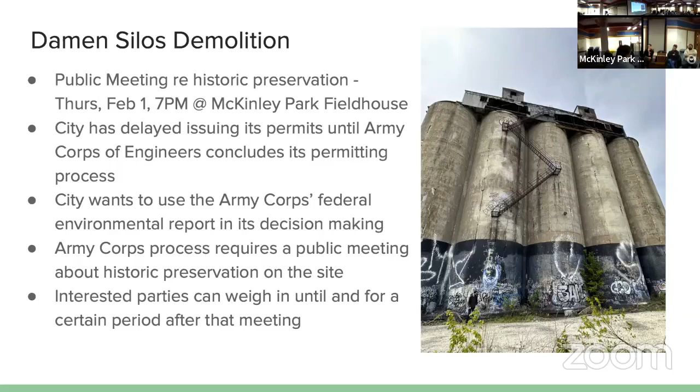We are running two classes with UIC. We had a site walk as the temperature dropped below zero on Saturday, so I really want to thank our graduate students, several of whom are online with us right now, for braving the weather and coming out.

Also, one of the fun things I learned today—did you know that you can buy a CTA sign from CTA? I pulled these up on their website, and I thought, when we grow up and have office space, I really want one.

Anyway, we're going to be looking at two projects in the neighborhood. There's an undergraduate seminar working on some basic design and community engagement work, and they are going to be looking at the alley between 35th and Archer, near the Family Dollar—the alley that goes right to your office at Briza—and how to make that more welcoming, with the idea that we'd encourage people to use it as a pedestrian path instead of walking on Archer. So we'll be looking at things like cleanup, greenery, maybe moving some dumpsters, public art, better lighting, and some basic retail stuff.

Part of the hope is that if we can do that much, we might eventually get CTA to turn over the parking lot right next to it, which is one of two parking lots serving that L station, with the idea that it could become a linear park.

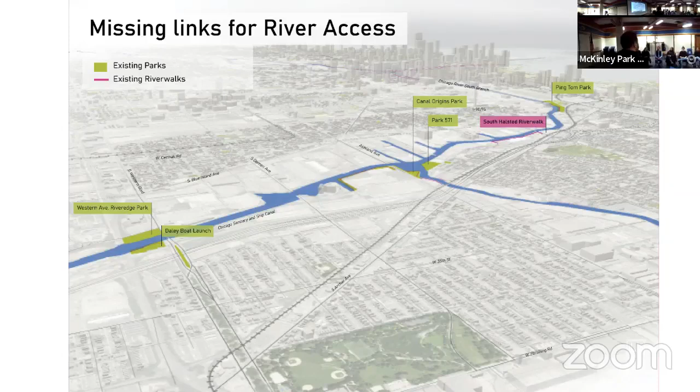We're in talks with different railroads, different property owners, to see what we can do to extend the paths. As Kate said, there are riverfront guidelines, so whenever anyone sells property, they have to build a path.

But at the end of the project, in the future, ideally someone will be able to get from Western all the way to Ping Tom Park, and then someday all the way to downtown, without having to get on any of the major streets like Archer, which is not so pedestrian friendly.

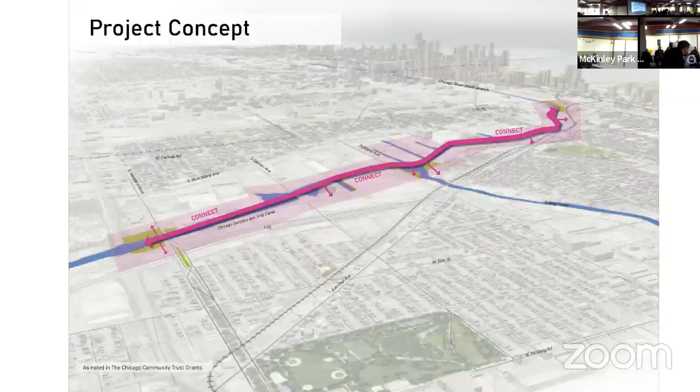So like we said, there are currently riverfront guidelines. So if the silos get torn down and they build something, they'll have to build a path to the specificity of a template path, gravel, specific trees, and whatnot. Existing property owners don't have to follow these rules.

But as we talk to them and we can get them to build paths, we'll try to build something that mirrors the guidelines as closely as possible, so it feels like one continuous, similar path. I'll turn it over to our guests, unless anybody has questions about what we've done so far.

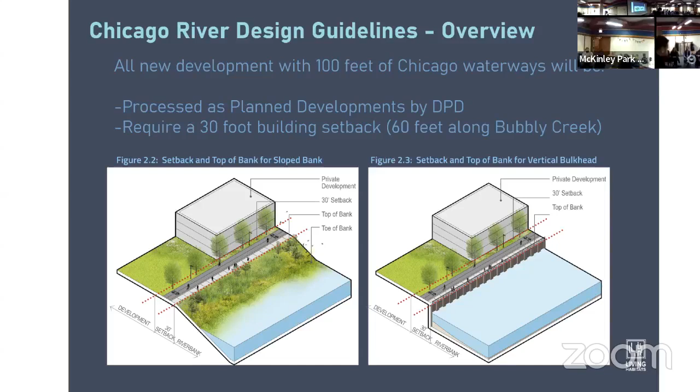Slides while you take questions. How's it going? It's going well.

So we've done our initial assessment of keeping track of everyone who owns property along the riverfront. We know everyone who owns something on there. We've had two community feedback events, one at the Riverfront Trail on Halsted, right behind, and then one at the holiday market that we hosted.

And those have gone well. We're going to have additional ones. We're in talks with the BNSF, Canadian National, ComEd, to try and figure out what we can do to get them to let us run a path through their property.

There's a few railroads, there's a railroad that runs between Damen and Western that doesn't get used, and it's a long strip of land that would connect that. It's owned by the BNSF, so we're talking with them. Same thing with Canadian National, trying to figure out how to get people across Halsted. ComEd has a substation right next to the current path. So we're talking with everyone to see what they'll agree to do, and then figuring out who's currently selling or planning to sell property.

Because if it sells and they develop it, then we'll have to get another path, so we need to make an inventory of everything. But it's going on, people are talking.

If you need any assistance with any of the folks connected to the railroad companies, I can help, and with IDOT too. There's a little piece that belongs to IDOT.

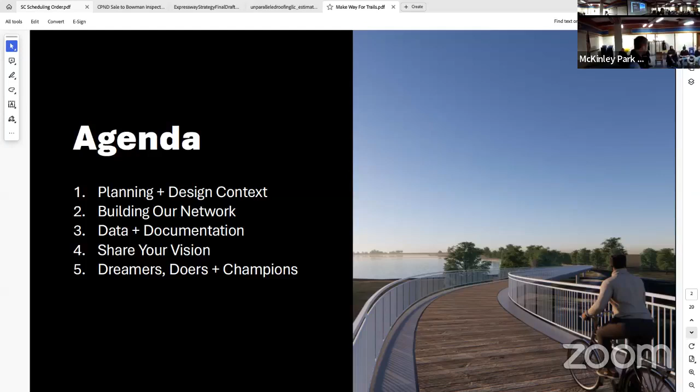They also can operate in a cross-jurisdictional manner, which is very hard for the Chicago Department of Transportation or IDOT to do, because they're really only allowed to do things that they own.

Cook County spreads a little bit thinner and can do a lot more interesting things. The work I currently do in an on-call capacity with Cook County is stitching together some of the sticky gaps in your trail network that are part IDOT, part railroad, part park district. Sometimes closing those gaps can be the most impactful.

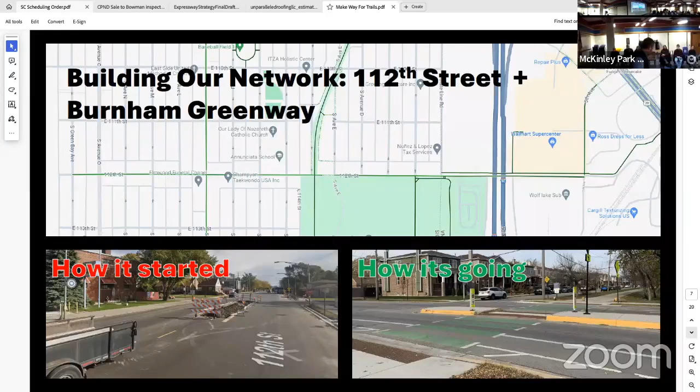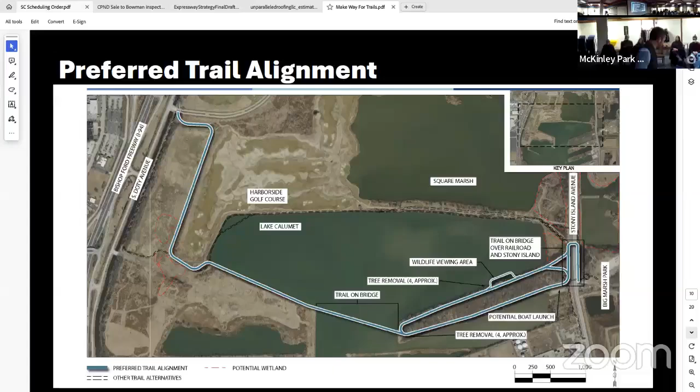The exciting thing about working on studies like this is you also have access to a team of people who can render and say, well, what would it look like when we build it? That is a huge win, and I think it's really important.

This shows what the trail would do as it crosses Stony Island Avenue. Sometimes the best way to deal with the railroad is to say, we're just gonna go over. It's much easier to get an overpass than an at-grade crossing or an underpass. You don't have to deal with drainage, security, lighting, all of those things, but you need to go pretty high up in the air. So this trail begins to rise from pretty far back to meet the clearance to get over Stony Island. And the good news is it would land right in Big Marsh Park, so you're not having to then navigate another intersection.

The Park District and Big Marsh were supporters of this and members of the steering committee. So when you're thinking about who might be involved, start thinking about who owns the property that you want to have access to. Do they benefit in some way, or can you structure this so that it's a mutually beneficial or community goodwill building effort?

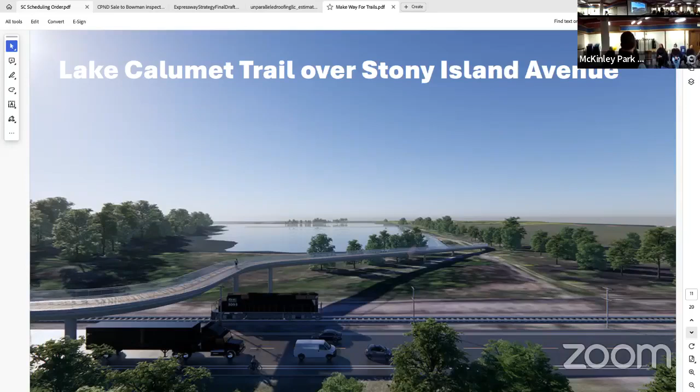But once you also start sharing the vision, people start asking, how much is this going to cost? I think it's always important to think of these items I was alluding to. Who owns the land? Who's in the business of actually owning a trail? Sometimes you're asking someone to be the owner of a trail and they've never done so. They have no concept of what kind of immunity or liability insurance they would need for someone that has a slip and fall or gets injured on the trail. So finding entities that are familiar with that is also a component of getting buy-in on a trail network.

You also want to know who maintains them. A good anecdote we learned in this process is the Chicago Park District, a big supporter of trails, does not have structural engineers to investigate, inspect, and maintain bridges. They would rather the city of Chicago take that on. So if you have a structure, the Park District may not be the best one to take that on. This requires a lot of formalized coordination so that the people who have the expertise, the funding, and the jurisdiction to do the thing you want are right in the room.

There's going to be a lot more investigation that goes into making this trail a reality. So the study outlines the kinds of investigations you'll need to take on. Kate alluded to historic and environmental concerns. There's also groundwater, contaminated soil, special waste, soil structure. A lot of those things come into play later on, but this helps set the stage so that the city, the Park District, and any stakeholder or consultant knows what they're getting themselves into.

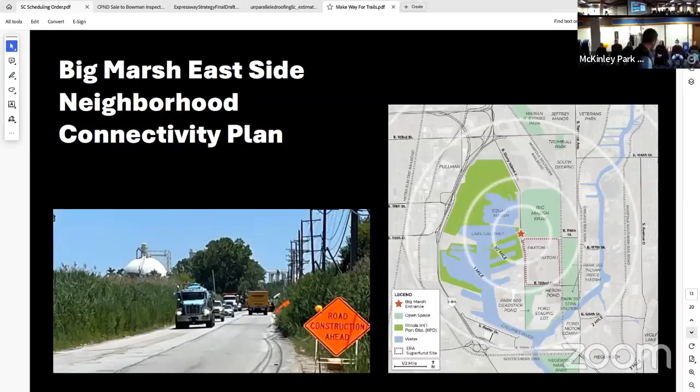Because you've got truck traffic in both directions and wetlands on both sides, it's not your best candidate, but 116th Street is probably better suited.

The follow-on from Lake Cal into this study was to make sure we're being consistent between plans and not creating a contradiction or conflict. The goals of this project were to connect these facilities to each other and confirm who has jurisdiction. Sometimes the state has jurisdiction of the roadway, sometimes the city does. Interestingly, 116th Street is not actually a street anymore - it's an almost vacated right-of-way fully owned by the Chicago Park District that intersects with Torrance Avenue, which is under state of Illinois jurisdiction. The 3 houses at that intersection are still on septic tanks, giving you an idea of how old this area is in terms of development.

The other thing we look at is once we say it'd be great if we had something on Torrance, we need to make sure that recommendation is feasible. Otherwise the state of Illinois would say we can't make that work, we need all of this space for the traffic that's currently there, we don't have access to additional right-of-way. And as I mentioned before, almost everything down here is either a Superfund contaminated site or a wetland, almost no in between. We also always need to figure out what is the cost to build it, and what is the cost to maintain it.

A good case in point is if you've ever biked on Stony Island, there are bike lanes out there, but it's not in the street sweeping program on a regular basis. So even though you can get there, there's glass and debris on the bike lane. Their recommendation is if and when you upgrade it, please start sweeping it - some things as simple as that.

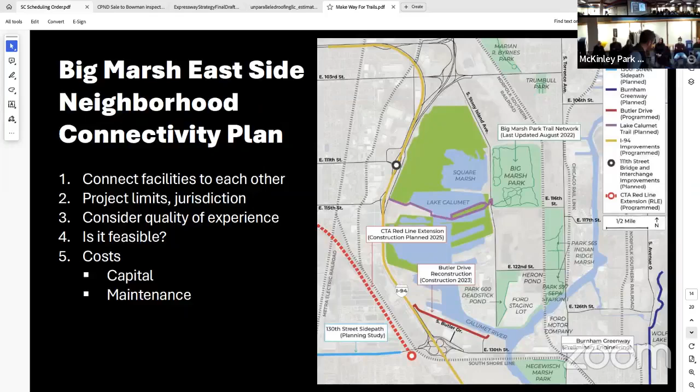The 116th Street vision is pretty straightforward. It's not going to be a very busy or trafficked street. One preliminary idea was to just make a shared street out of it - very low speed, very low volume, pretty low stress. So maybe we can just do a shoulder and some shared travel lanes. It's going to behave more like a park entrance drive than a street, since it terminates just a few hundred feet to the west where the bridge over the railroad tracks would begin to get into the big park.

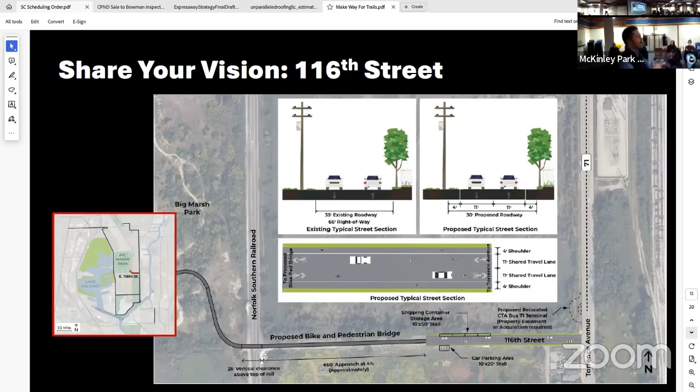When we talked with Cook County and the park district, they said if this starts to come together, maybe we start to use this as our main entrance to Indian Ridge Marsh, which is the other major land holding out that way. So they started building their own case, saying they wouldn't invest in paving a street that just leads to somebody else's park. But if we make this part of a larger system, then we can make a stronger case.

Getting people from farther away - if you're familiar with 103rd Street, this is an intersection where 103rd Street, Doty, and Stony all become part of this big spaghetti bowl of interchange nonsense. We said that's not low stress either. So how do we get people from the CTA 103rd Street terminal across 103rd Street onto Doty Avenue, which is heavily trafficked with trucks, and give them their own space?

And those bike lanes on Stony, rather than one buffered lane in each direction, let's put both of the bike lanes on one side, add some protection, and finally create a facility that you would feel comfortable biking to Big Marsh Park with your family.

Can you take a second with these to explain right of way? Sure - because for some of our neighbors, these are going to be some new terms.

So what you see in these images is how wide the road is from edge of pavement to edge of pavement. That's the available width that we know the road is today.

It's also important to know how much property the city or state has beyond the roadway—that's referred to as the right of way. We can generally make things work for a lot less cost and headache if you can fit it within the existing roadway, but if you need additional space, it's important to know how much you have within the right of way, which is reserved for utilities, drainage, and any future widening.

More often than not, especially in some areas, the roadway and the right of way are very close together because there's not a lot of room left, which makes it challenging. But in some areas down here, it's actually quite wide, so we can reconfigure or repurpose how the roadway is set up to make that space. I'd say the majority of urban bike design we do is trying to create mere inches or feet from an otherwise wide roadway.

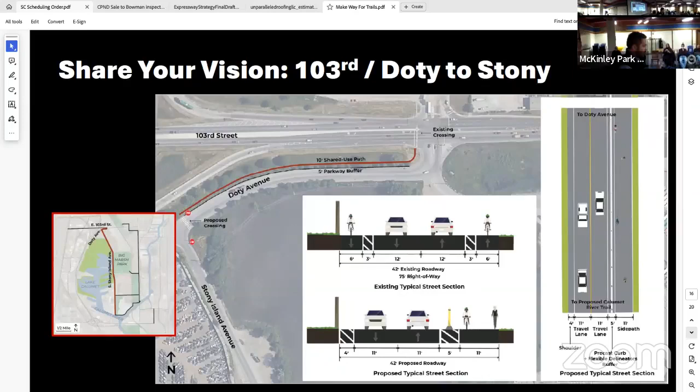Or as I showed you on 112th Street, instead of 4 lanes, can we get by with 1 in each direction and a center left turn lane? Suddenly we have 10 to 14 extra feet to work with, which makes it a lot easier to make room for those facilities. So that's a good primer on what roadway width versus right of way width means. And if we want to get really wonky, we can talk about edge of pavement to face of curb—sometimes we're working with mere inches to try and create enough space.

Some of this work is being memorialized in the Lake Calumet Bike Network study, taking all those recommendations, validating them, and putting more scope behind them—saying, okay, this roadway is going to be resurfaced 5 years from now, so the best way to do this is wait for the resurfacing and design it to be included at that time. That way we're not adding a whole lot of cost to the project.

I think Cottage Grove is a good example. The city's working on design right now to upgrade that from a buffered bike lane in each direction to a separated bike lane. They're going to do it with the next resurfacing, and then they can add their precast curbs without having to worry about changing the drainage situation.

Other projects are going to take a while. For a bridge over the Norfolk Southern Railroad, we met with them very early to say this is an interest, but until there's real momentum, Norfolk Southern doesn't need to be involved until we start asking about their project development process—things like height clearance requirements, which we've already researched. Eventually we'd have to go to them for an access agreement since we're crossing over their air rights. So we don't tackle everything all at once.

These projects will go before the Lake Calumet Bike Network Steering Committee next Tuesday night on the 22nd—our fourth and final steering committee meeting. We'll wrap this up probably by March or April, and then it'll be available for public consumption. The Lake Calumet Bike Network Study current state of biking report is available on the project webpage, so I can provide that as a follow-up for anyone who wants to review what's in there so far. We'll be amending it with the recommended projects in about a month or two.

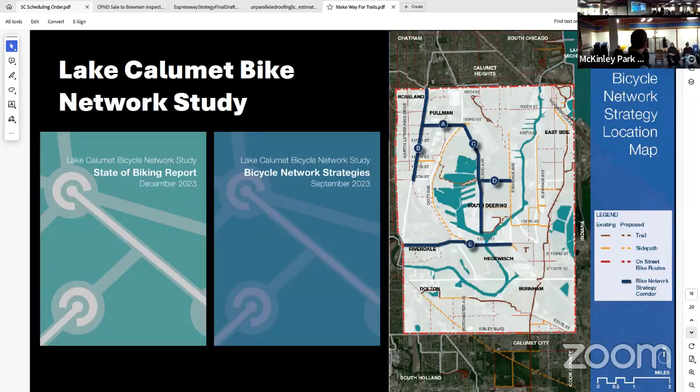So if you want to build it, we need to figure out how that's going to come together. That's usually a question that doesn't get asked until a little too late in the process, and then suddenly people get very wary. So when you learn that you need to make sure it's in the sweeping program for the city, they can start to anticipate additional labor hours every year to send a truck down to keep it clean.

I wanted to put this image in here as a nod to the work that Eladio mentioned earlier. Prior to joining HNTB, this was a privately funded, pie in the sky daydream of a vision. Active Trans connected us with the funder who said, I want to come up with an idea for how we make this connection work.

This was the first time we started talking about whether we could do a boardwalk style trail, as long as we're outside the navigable channel of the federal project for a federally controlled waterway, because the Army Corps and the US Coast Guard have very clear requirements to keep it open for commerce, shipping and navigation. So we can't impinge on that, but if there's space left over, or by being creative and working with adjacent property owners, can we split the difference and get a little of their shoreline and a little of the non-navigable portion of the channel, and still keep it wide enough for two barges to pass each other plus some extra breathing room.

I think that's the biggest takeaway. I love sharing the images because it gets people excited, and then they start asking questions like how is this going to work, where is it going to go, who's going to own it, who's going to maintain it, how much will it cost.

Those are the questions I like finding answers to, because they can be overwhelming for people that don't do it. But the big takeaway I wanted to share was the dreamers, the doers, and the champions. I think all of us are a little bit of all three. Having that dream and that vision is definitely where you start. A connected riverfront trail vision is something that predates my involvement in any of these trails, but there's a lot that can be done.

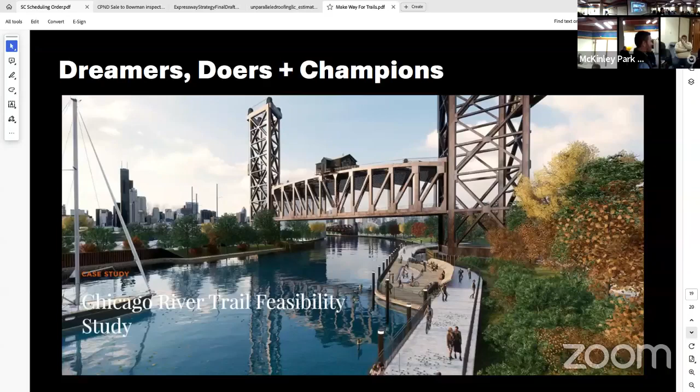A lot of the projects that you showed were incredibly complicated, with a whole lot of different kinds of spaces that are really cramped in a lot of ways. Can you speak a little more to that, because this is obviously very compelling to us, since it's here, right in front of us, and it's pretty big. You can visualize it. And it's cold now, and this is very nice - it's very nice to go hang out at the same time. But can you speak to, there's a lot of room down here.

As you said, it's inevitable that someday that land will change hands. So we have momentum, we have legislation, we have some money already - there's not only teeth but momentum going on to do this. So when you're thinking about this, I don't want to think about 20 years out, like in 2044. I understand that growth is part of the avenue - once you get certain pieces in, then it would be like connecting them. Can you speak to what you see as, other than maybe that bridge, some major sore spots you found, or maybe some bright spots - hey, this was really easy, this should be something that could give us a little encouragement.

I wanted to pull this slide up because I think it encapsulates how some of those less exciting, less sexy, and not nearly as well-rendered projects can really make a difference. Getting to the Burnham Greenway - the Greenway's already there, it's not as spectacular because it's not new and shiny and it's kind of in an under-bridge area, but a lot of people use it to go north and south on the east side. Getting to it was the challenge. The images here show just a little bit of concrete work in image 1, where they recast a curb as part of the city's on-call engineering program. The green pavement markings plus the sidewalk pavement markings - that entire project was less than $150,000. Then we added signs so people knew the Burnham Greenway and Calumet Park were less than a mile from where they were. We also added contraflow bike lanes on Avenue L and 98th Street, so you can get back and forth to Ewing Avenue's bike lanes without having to go through that gnarly 5-way intersection at 100th Street.

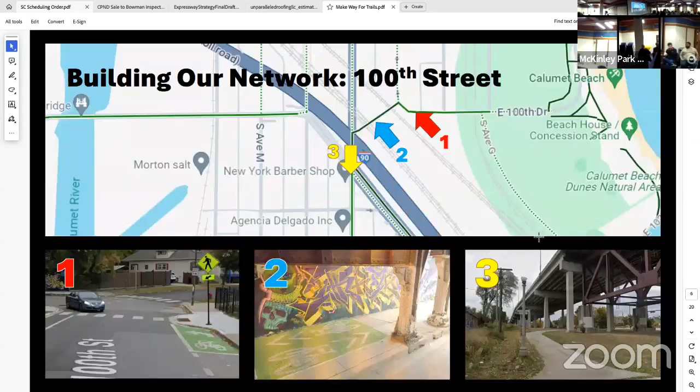dispensary, one of the conversations was like that between Archer and, or Ashland, and 35th - well, Ashland and 35th all the way to, I guess, the Bridgeport Arts Center, is huge.

Enormous, nothing, plenty of space. And if we keep building pieces - like, you've got a piece there, and once you get past Sox, there's plenty of wonderful bike lanes all the way to the lakefront. If you start building pieces of it, then you can just start pointing out this part doesn't have it, and it's like 2 blocks.

The stubborn gaps, yeah, like this is a pain point, and then you can actually point at it. Rather than say, well, we need all of this, and you can't give us all of it, now we just need this one piece. That's an easier ask. And you can make a big stink about one block, chip away at it, never give up on the total vision.

Yeah, that strategy worked with Archer as well. North of 31st, Archer has bike lanes, and now south of Pershing, I think there's something in the works. And Nicole was really open to boxing it in.

She said that's a great idea, especially with the dispensary coming, there's gonna be a bunch of people walking around, and we want this more pedestrian friendly. There should be some bike lanes, because every time I bike down there it's just insanity. And she's like, yeah, you're right. So the more people we can get nodding their heads, because it makes sense, helps. This is a room of people that already agree on what we're doing.